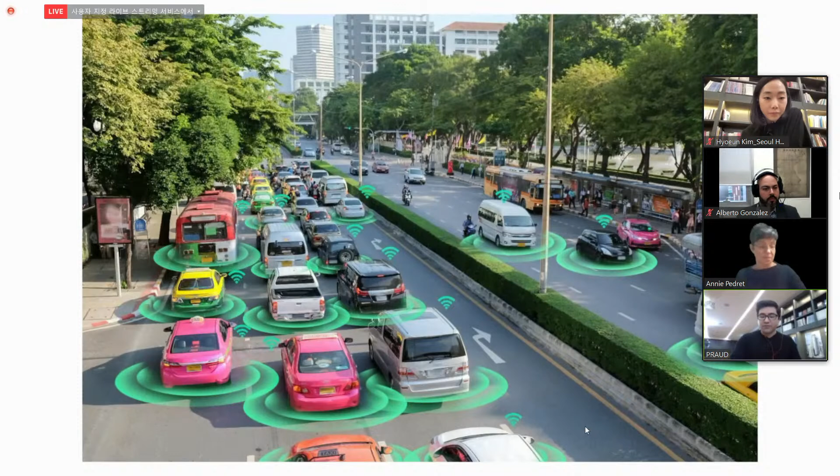If this is a reality we're moving on to—and this is highly speculative, but let's say it's an educated guess—we can think of what spaces could transform into these autonomous mobile spaces. Seoul already has this indication of compartmentalization through the urban room, commonly known as the bang: the PCbang, multibang, noraebang, jimjilbang. These are meant to be social spaces but also compartmentalized spaces, with the potential of being transformed into social interactions through mobility.

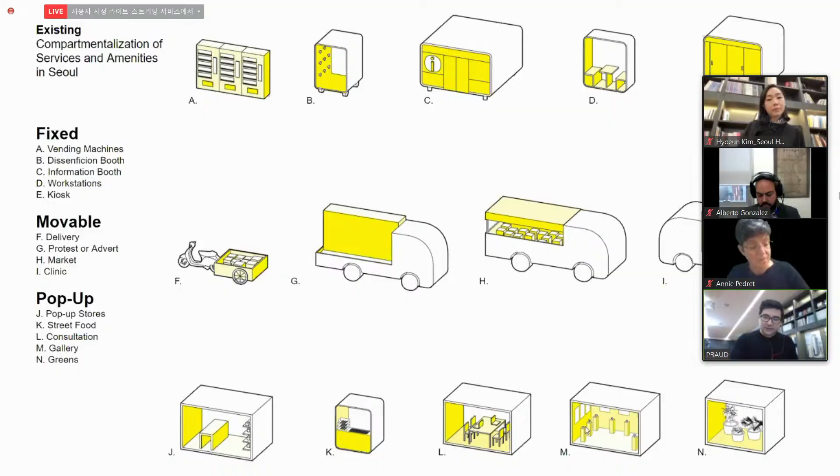We also already see in the city other types of compartmentalized amenities and services, some already mobile, that achieve a micro-architectural space which could easily be adapted into these mobile rooms. So if we're thinking about services, amenities, and social interaction moving towards the autonomous mobile space, we have to consider the implications of mobility in relation to architecture.

Especially when these are the future scenarios we're constantly looking at with new design firms like IDEO or Bosch, idealizing the mobile space as the future of the workplace, for example, or the future of these X spaces.

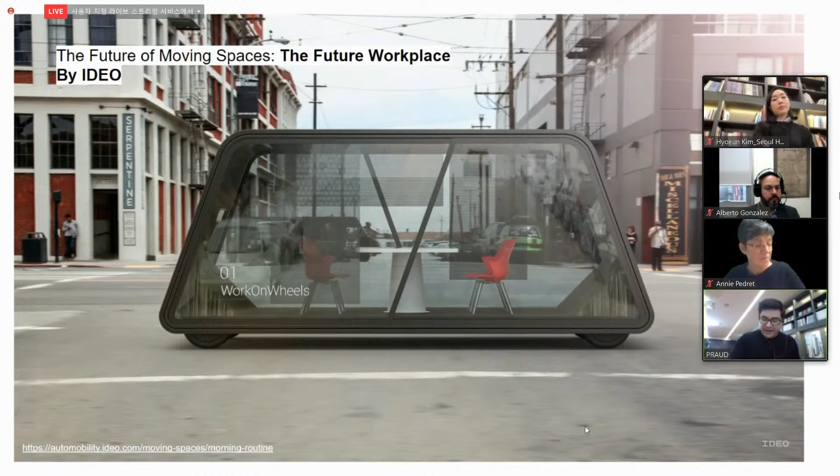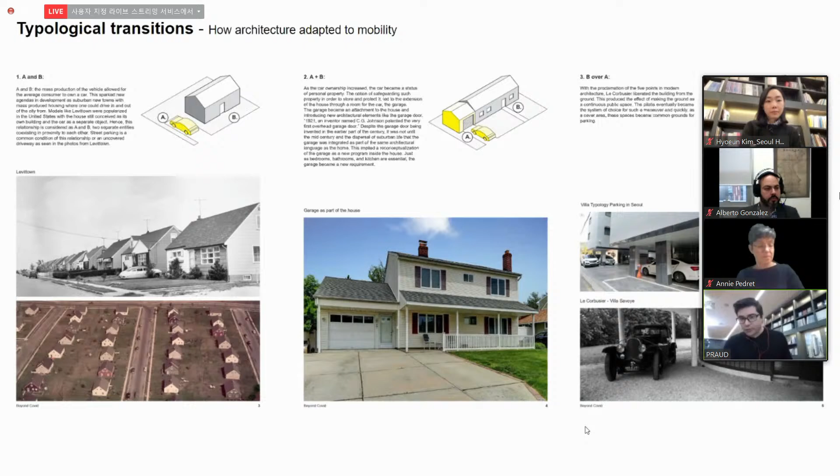We can look at the lineage mobility has had with architecture, and the way mobility has transformed the architectural typology—starting from the single home, finding the need for where to store the car, making an additional room, bringing the car into the home, lifting the home from the ground to give space to the car, and other mutations that have continuously occurred as we advance our construction technologies, radically transforming how we conceptualize the interaction between the vehicle and architecture.

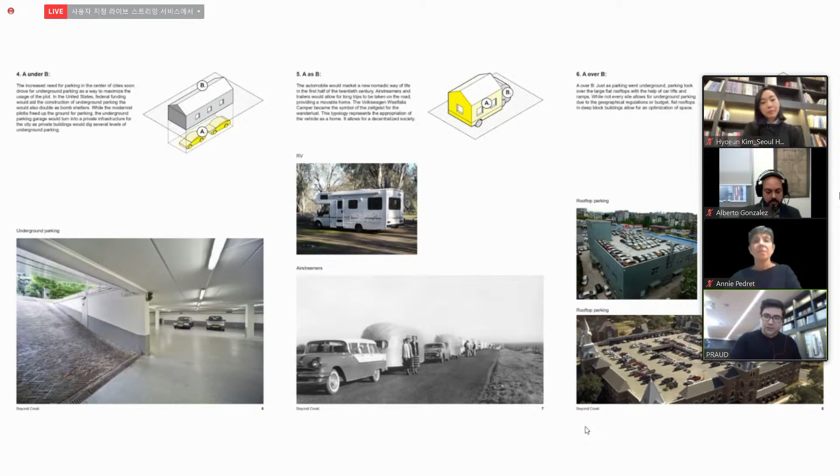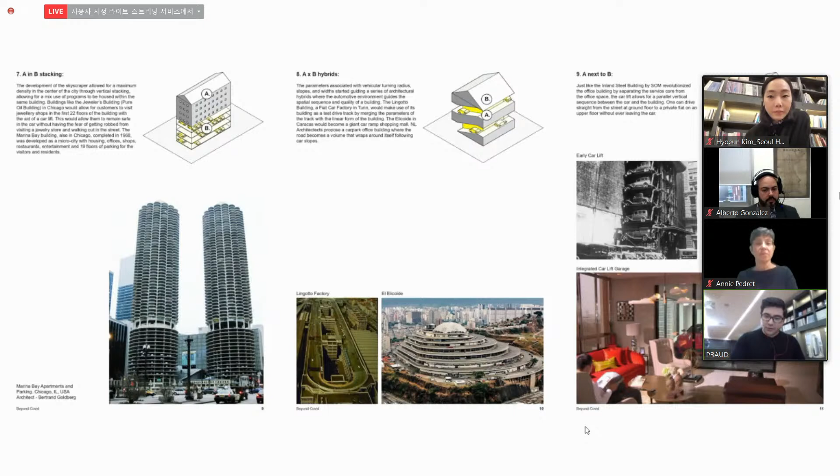Transforming into radical typologies, as we've seen in El Helicoide in Caracas, Venezuela, or the Lingotto factory in Turin, to more contemporary situations like in Hong Kong, where an elevator brings the car all the way to your living room in a skyscraper, and more traditional automobile typologies like the drive-through, drive-in, drive-to.

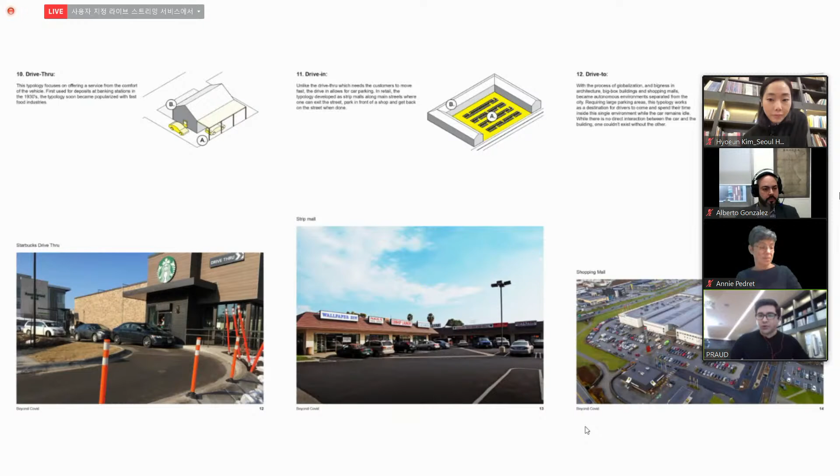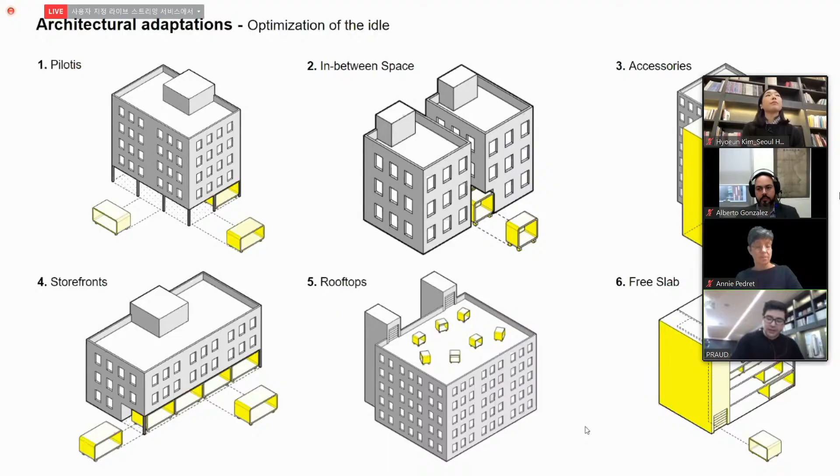This again puts us in the question of how architecture is going to transform when we have these movable spaces. Where will these movable spaces plug in or mutate the current existence of architecture, or the current understanding of architecture?

This, I think, puts us at a critical point in time analogous to the 1960s, when firms like Archizoom, Archigram, and Superstudio were also asking these questions: what is going to be the future of our cities? At the time, of course, they had more pressing conditions coming out of World War II, the threat of the Cold War, the Berlin Wall—very political, social, dramatic conditions that led to dystopian or utopian visions.

I think we're at the same point in time, where due to uncertainty at the political level, economic level, and environmental level at a global scale, we face the same challenge: what will be the way we can think of cities using these new components we've already envisioned—the movable room?

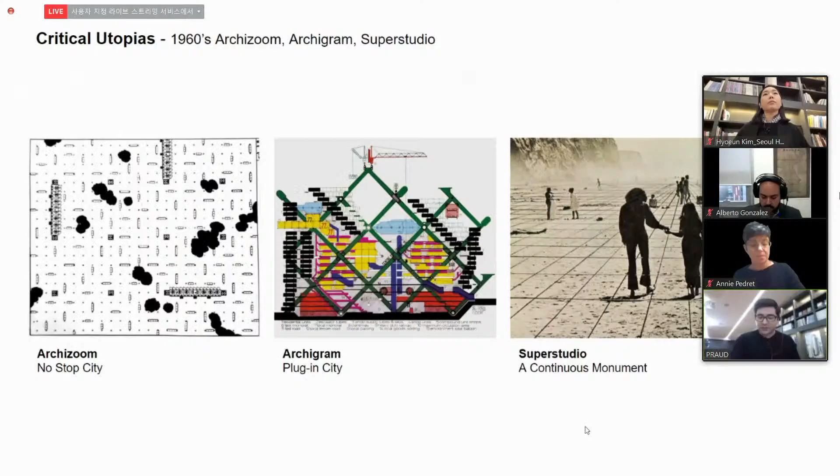Re-envisioning an instant city, once proposed by Archigram in the 60s, we can imagine that by having autonomous mobile spaces, you can drastically reprogram urban voids around the city. We can immediately bring amenities and services through these movable rooms to places that need them.

For example, monocultured apartment blocks could be radically transformed if you bring an instant educational platform, an instant entertainment platform, or other services and amenities, really bringing the plurality of the space.

Or consider the idea of a vending city—if everything has to be compartmentalized, separated, and distanced to maintain safety regulations related to COVID, is the autonomous mobile space one that's going to do all the servicing around the city, collecting in one space and bringing it to another?

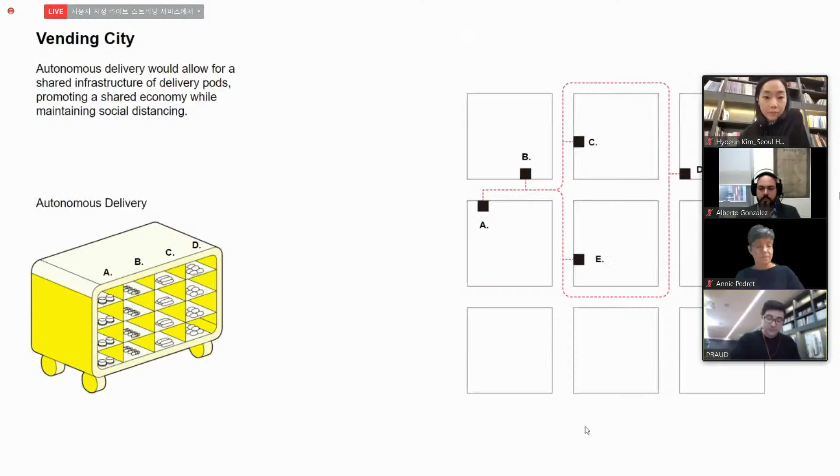Or, as the social agenda of social distancing keeps expanding and becomes more of a common rule, how is the city going to become a distanced city, where you no longer need to go to a restaurant or have food delivered to you, but instead have the experience delivered to you? You could have autonomous mobile spaces that pick up services and amenities and bring them to you, so you experience them in your own individual, compartmentalized situation, away from all the risks of COVID.

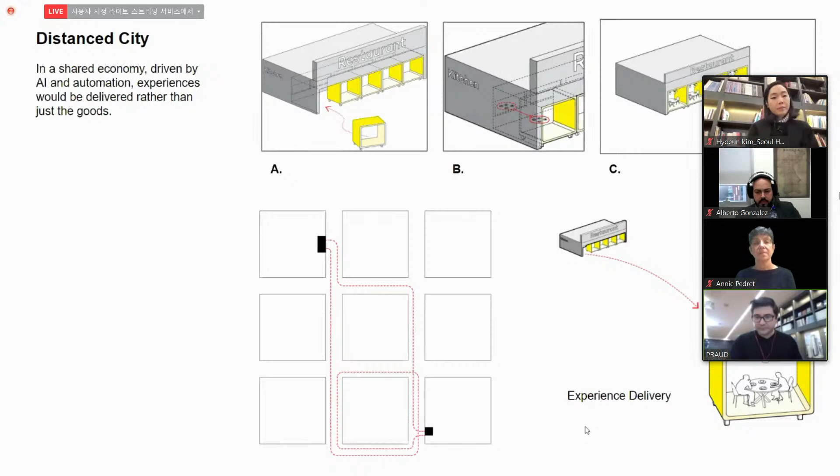We hypothesize a Go city, ruled by the idea of autonomous mobility, where you no longer need modern grids, but instead have swarm formations that create urbanity. You have the idea of dezoning, no longer needing a singular zone, but bringing instantaneous amenities and services so the city becomes truly mixed and hybrid.

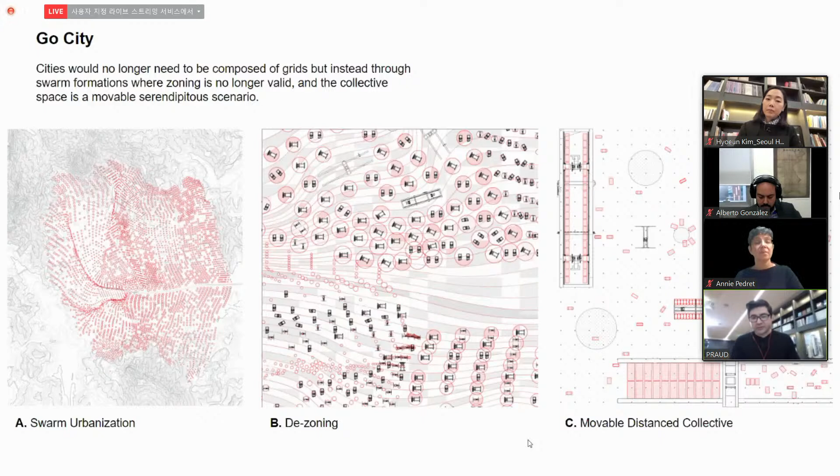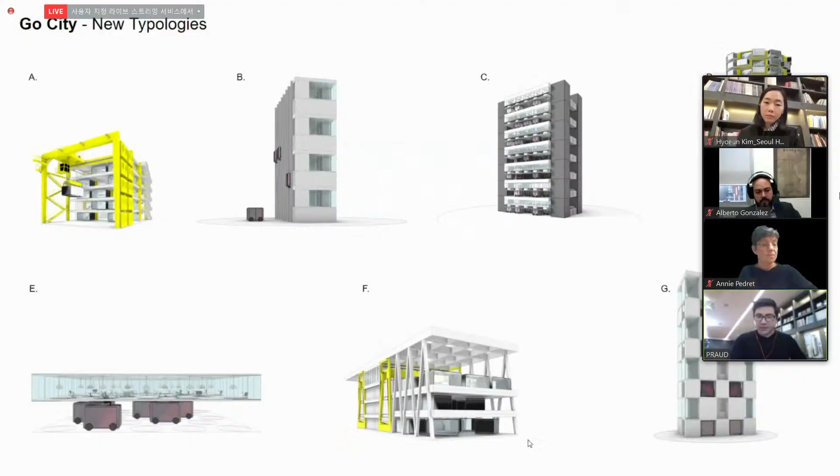And you have this idea of movable distanced collective spaces as opposed to fixed social spaces. So in that scenario, we ask what will be the role of architecture, and especially of architects envisioning these new futures. We can think of new typologies dealing with these new plug-in movable rooms, and what new prosthetics get attached to traditional means of architecture.

You could have a modern frame that has the static space and the service space, but now you could have these new prosthetic spaces of active, movable, transformable spaces, constantly changing the architecture.

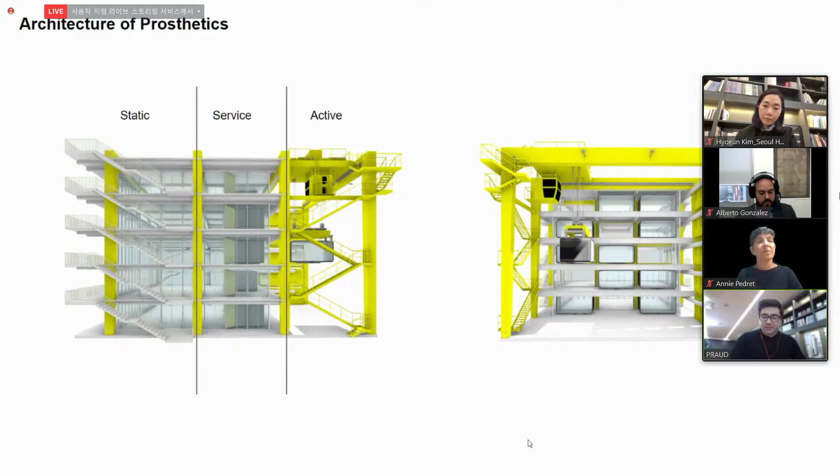How will we facilitate socially distanced human interaction? If we go back to the idea of the third space being one of interaction, but if that's a condition that is lost, what will be the new third space in that situation?

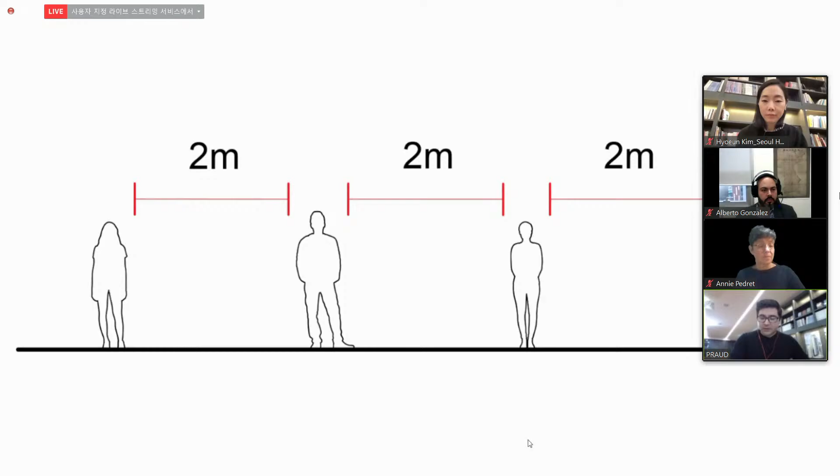We have the rules of social distancing of 2 meters, that a person has to stay away from the next person at a 2-meter distance in order to not wear a mask and be safe from transmission of the virus.

This can be diagrammed as a social space that demarcates the private or individual space as a 2-meter separation from each other. The collective becomes this 2-meter separation.

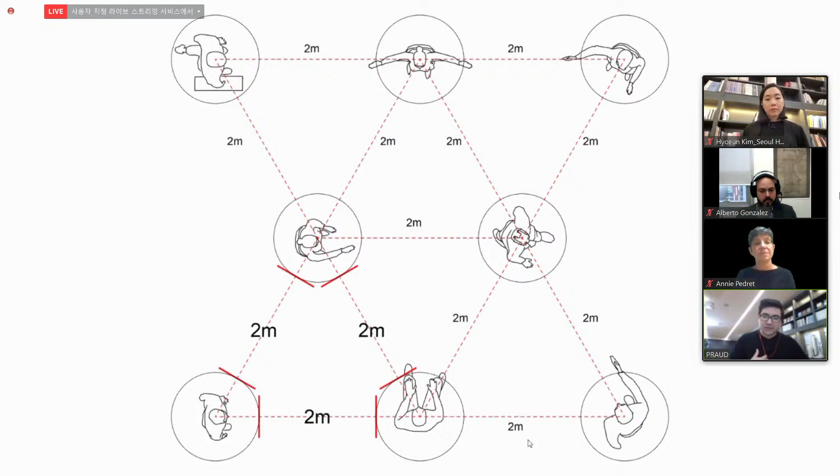We start thinking that 2-meter separation is almost a wasted space. Could the 2-meter separation actually become surface? Could it become usable, interactive, architectural? Can the 2-meter space, for example in this diagram, become a uniform table where one can have a dinner, work, or read?

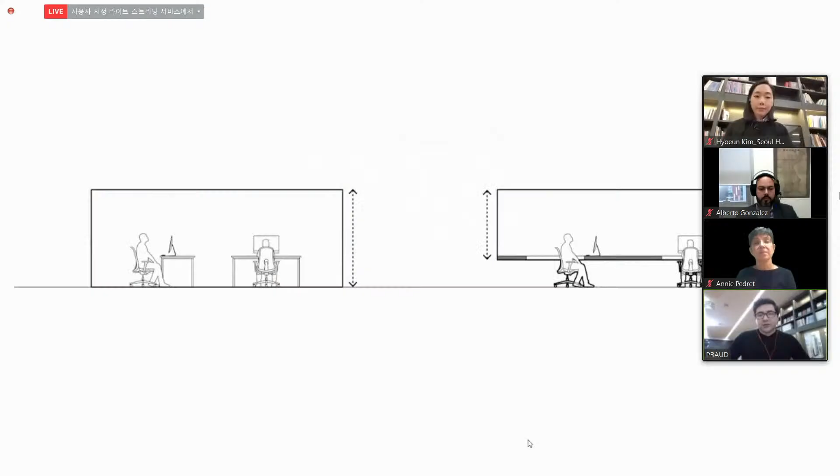So in thinking about beyond the third space, we conceptualize the idea of the half space, where on this diagram we see on the left the idea of a full space, the traditional working environment, being shrunken to the half space, where the 2-meter distance becomes the physical representation of the space.

And if we think about these movable pods having the potential of bringing somebody into the space, then we can have this transition or flexibility of exchange within that usable framework, where a pod can bring a person to one of these voids, pop them up, and use the space as they see fit.

So the half space could be one of these conditions we could envision as an interaction between the autonomous movable space, the autonomous movable room, and the way of physically manifesting these 2-meter separations. This would create the X space.

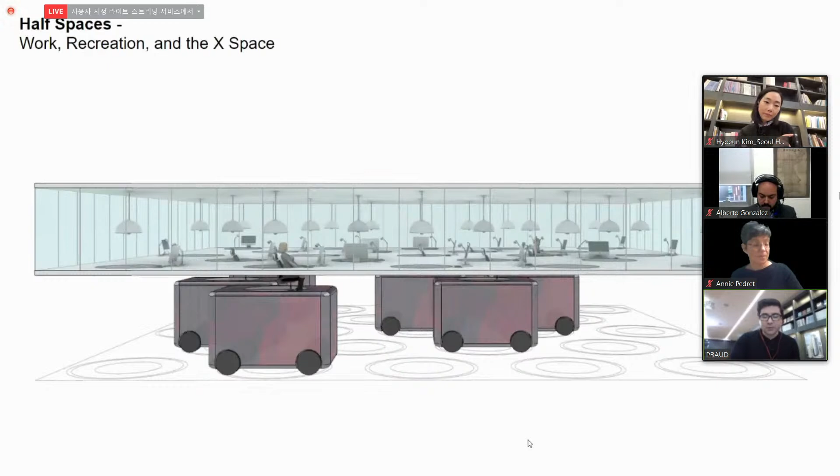I think theoretically this would challenge more theories of culture of congestion, the theory of verticalism, once proposed by Rem Koolhaas as the idea of layering different programs in one single building to produce the effect of the city, the social congestion within one building in order to produce events.

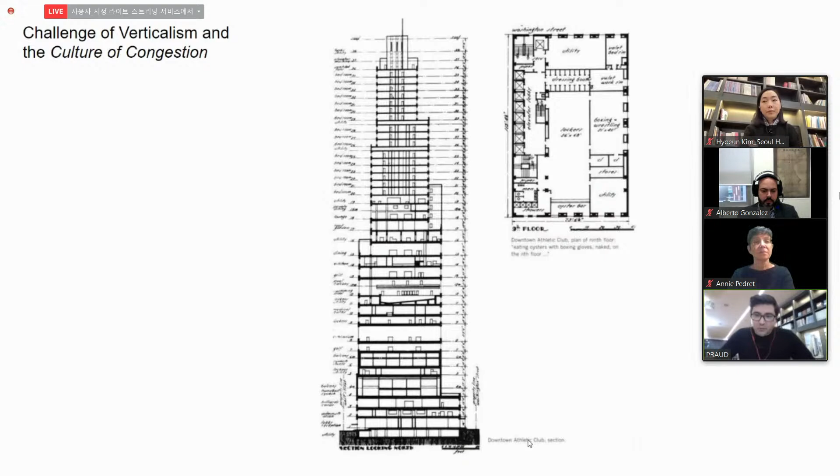And more importantly, something that I think was maybe not misunderstood, but somehow misguided or not fully represented, is his notion of understanding the interaction that occurred in the Downtown Athletic Club on the 9th floor, where you have the locker room, boxing and wrestling zone, and the oyster bar.

Which could be envisioned, from a theoretical point of view, as boxers changing in their locker room while eating oysters, which sounds like a ludicrous composition, but in a way, what it's envisioning is a really pixelated and hybrid way of understanding how you can interact between programs and merge them in one space.

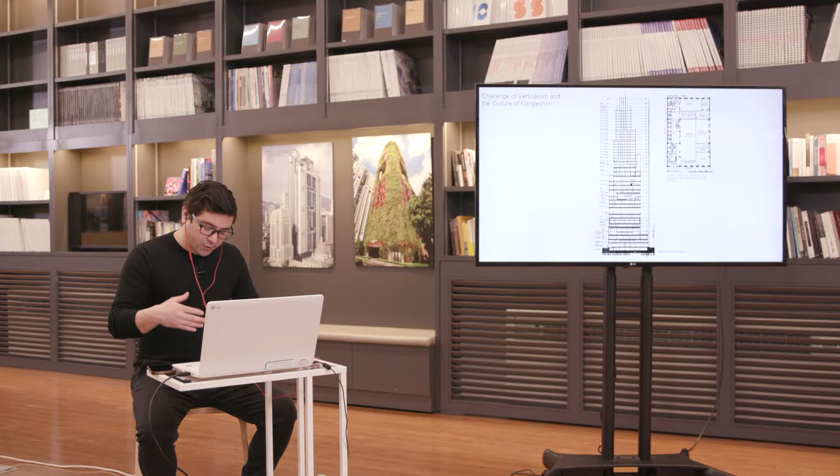But the idea of verticalism and layering has produced the notion of mixed use as something that separates program, traditionally understood as this stratification of program, where we have commercial, then office space, then residential, then some other space.

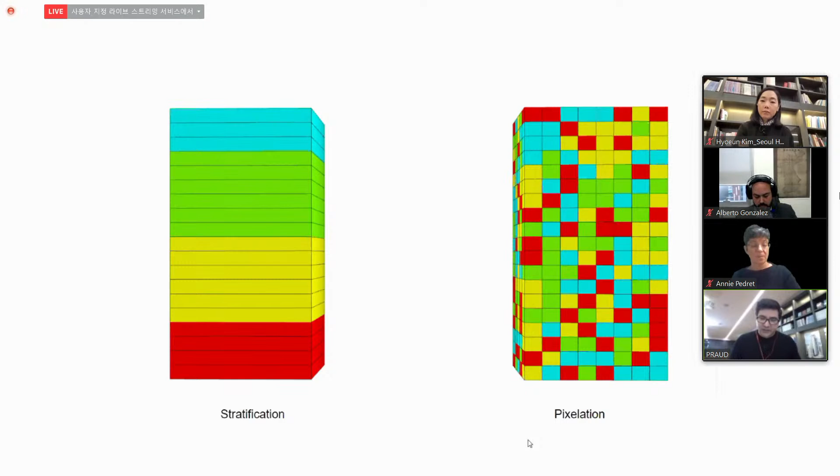When in reality, what we're trying to achieve in these highly congested cities is the idea of pixelation, mixing, social condensation, social congestion, interaction, interconnectedness—the idea of this third space becoming a physical space.

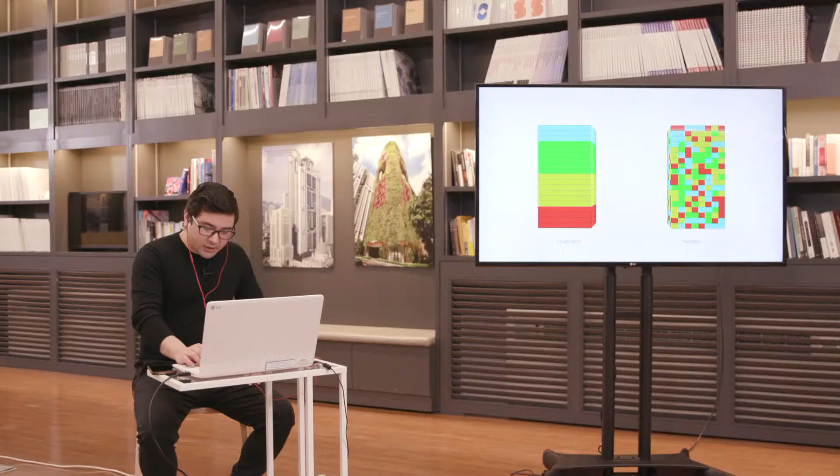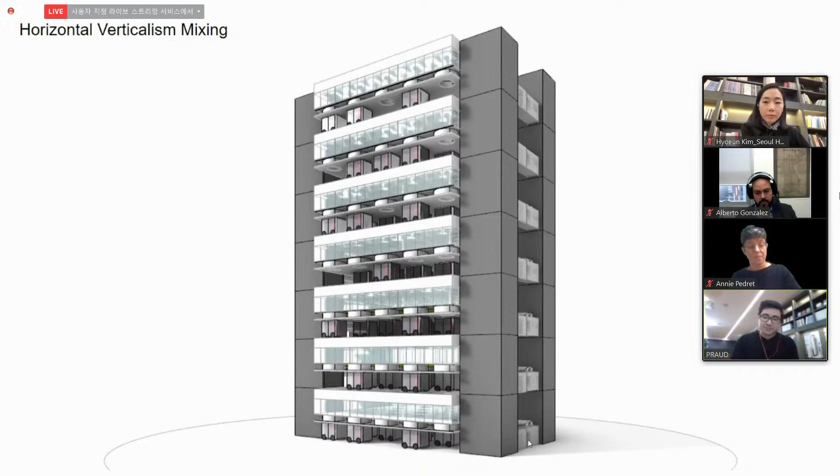And I believe this half space could be something that allows this pixelation, because if any autonomous movable vehicle can bring any service or amenity and be placed in any of these 2-meter gaps, that means the half space could be transformed by individual users into whatever they need, producing spaces that can still be serviced at the collective scale.

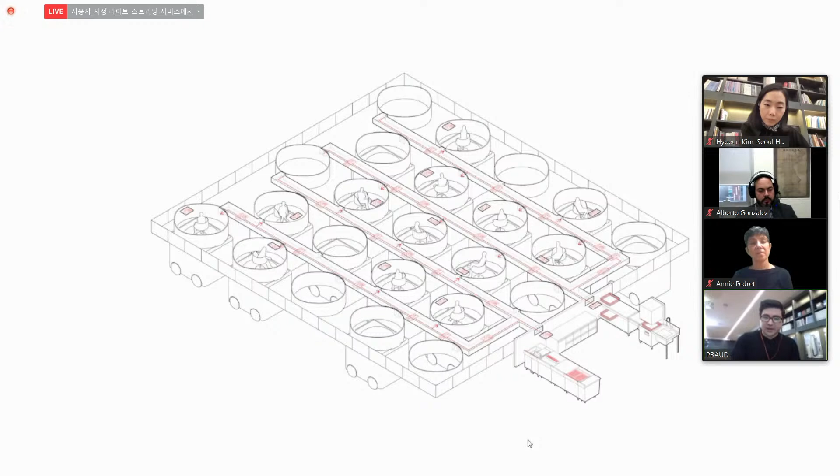They can still be serviced, but at the individual scale, you can have these spaces function as a cafe where I go eat and meet somebody and just have an interaction with one person, while somebody else could be working or having a Zoom meeting, distributing this horizontal space as a mixed, pixelated, interconnected hybrid space. How can we live together and yet stay distant?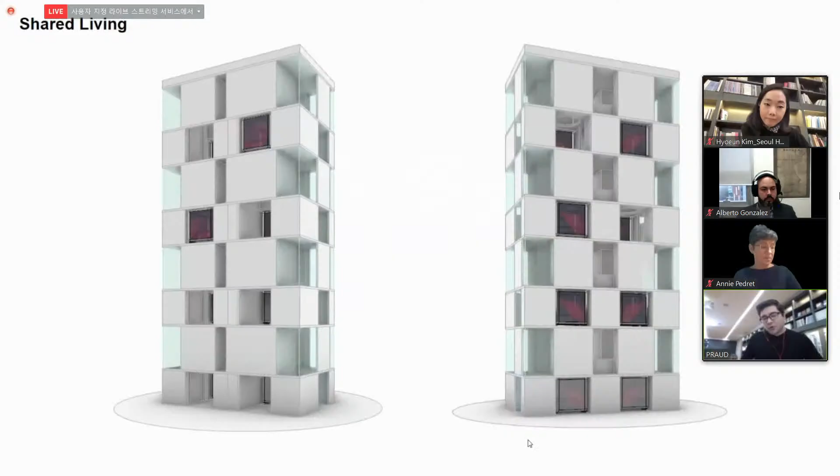In the idea of this 2-meter separation due to COVID-19, we can also interpret or speculate on new typologies of housing, where the mobile space will become this fourth space in the house.

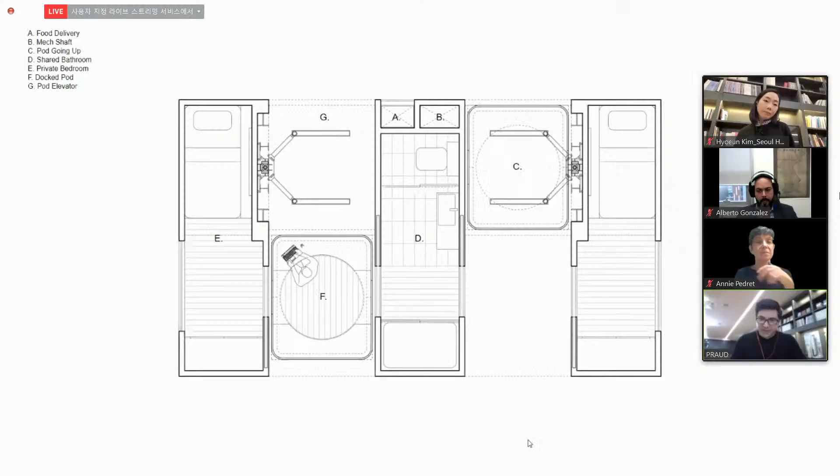Here you have a situation of co-living between 2 roommates. Each of them have their own mobile space, which could function as their personal workroom. But as it plugs into the framework of the residence, each roommate has their own private bedroom, they share a bathroom, and they have their own individual mobile room that they can use.

The mobile room can have this lift that allows them to come to a second floor where they can have physical interaction. In this case, it's a 2-meter separated table. So you can have 2 roommates that you could say live together, but not really—they live together but separated.

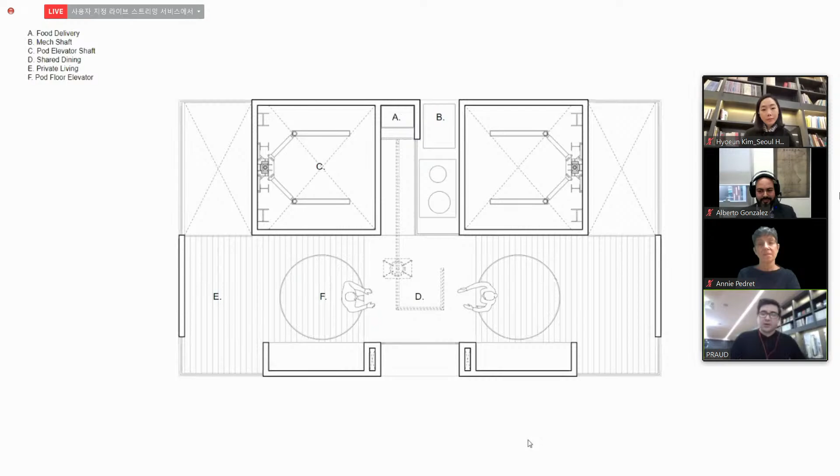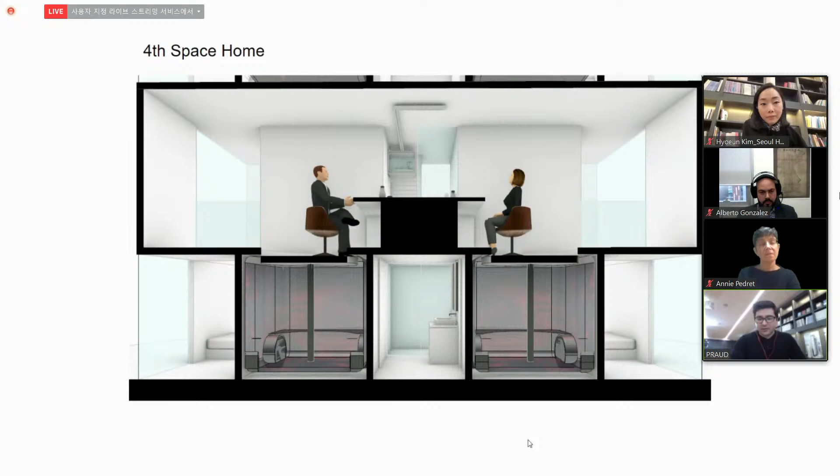You would have all these mechanical systems for food delivery that would bring the food. You no longer would have the need of a kitchen, and you would share the meal. So everything is compartmentalized, separated, yet at the same time you can still have social interactions. It would become a highly mechanized system that uses the autonomous mobile space as a plug-in.

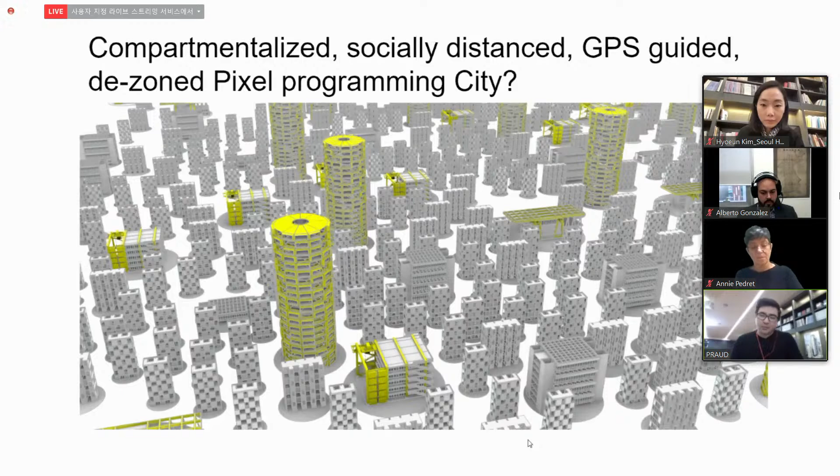So what would this be like for a fourth space city? Will it become something totally compartmentalized—socially distanced, GPS guided, de-zoned, pixel programming city? That's the sort of conclusion: if all of these technologies are things that we're moving towards, then what will the city be in the future with all of these situations and these speculative scenarios?

As a way of wrapping up this research, we were thinking of proposing a pavilion where you can experience this condition of the half space that we were talking about. Although we cannot build an autonomous mobile space due to budget restrictions, we can interpret what would be the condition of these flexible and transformable half spaces.

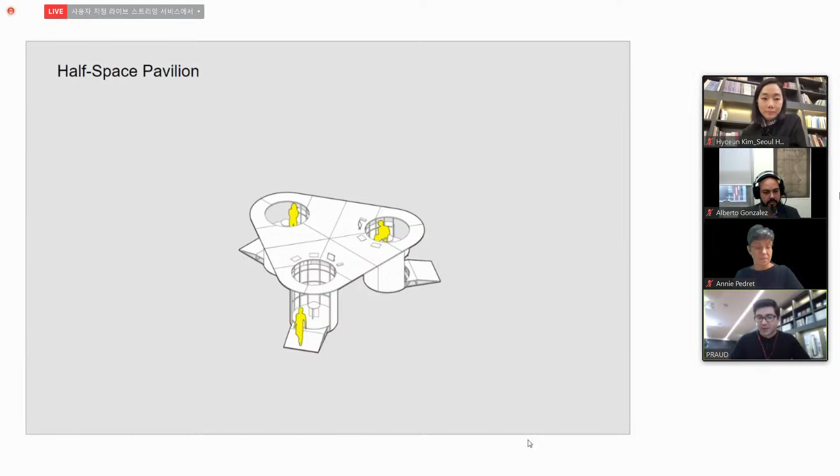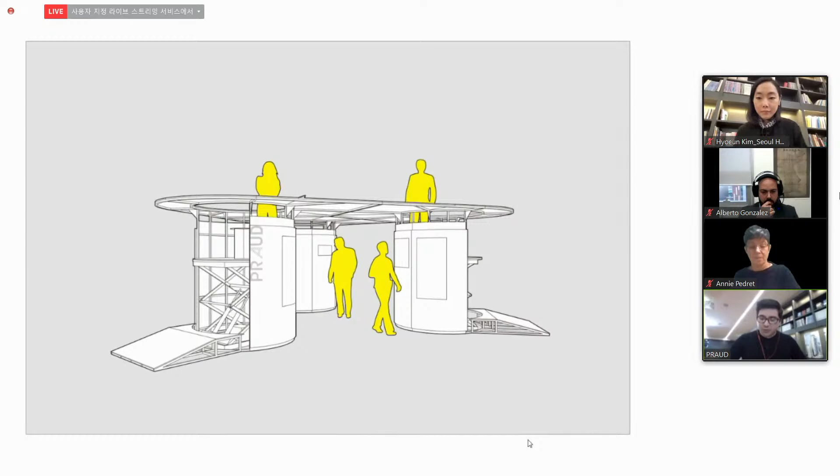So we want to propose to build a pavilion type condition that produces this physical manifestation of the 2-meter gap as the usable surface, that you can go up and down and use the space underneath in order to propose a space where we can exhibit all this research.

But in a way, this is not a way of representing graphic research, but really experiencing the future situation that could happen if we start manifesting what a half space could physically transform into—these 2-meter separations that could really have an impact on the way that we perform in the spaces that we occupy now.

And with that, I will conclude my presentation.